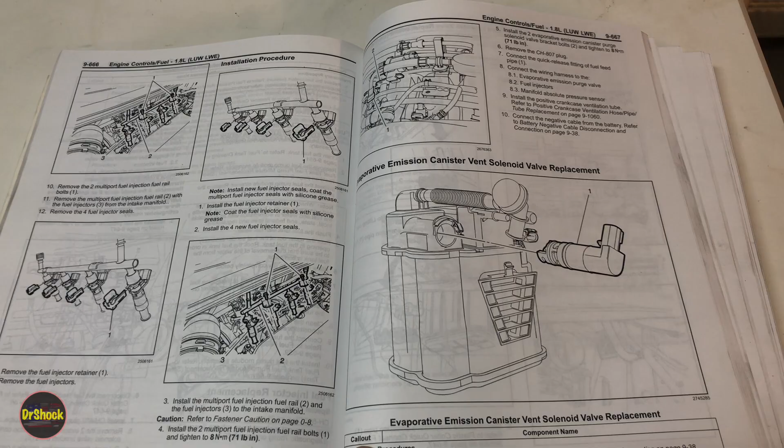All right, guys, in today's video, I'm going to be talking to you about how to find GM service information, service manuals, and that sort of thing. It's really handy to have a hard copy service manual for the vehicle you're working on. But if you don't have that, it's great to have the online version. But you usually need one of the two to get through the repair job.

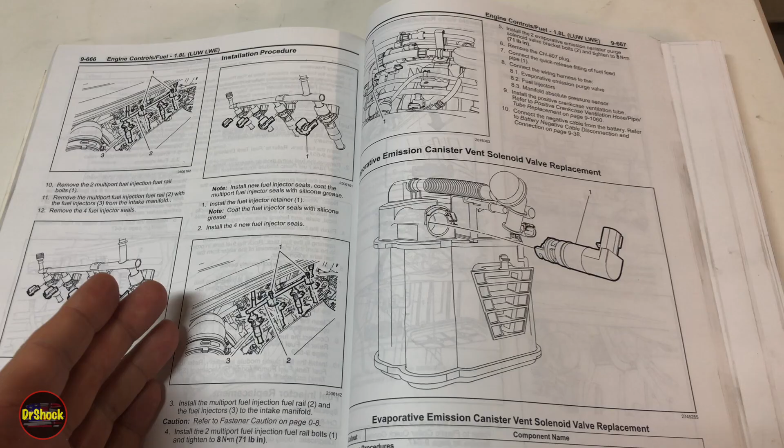Things can be very complex nowadays. There can be torque values that you need to know. There can be specific orders of operation and specific procedures that you have to follow. So where can you find books like this, online or otherwise?

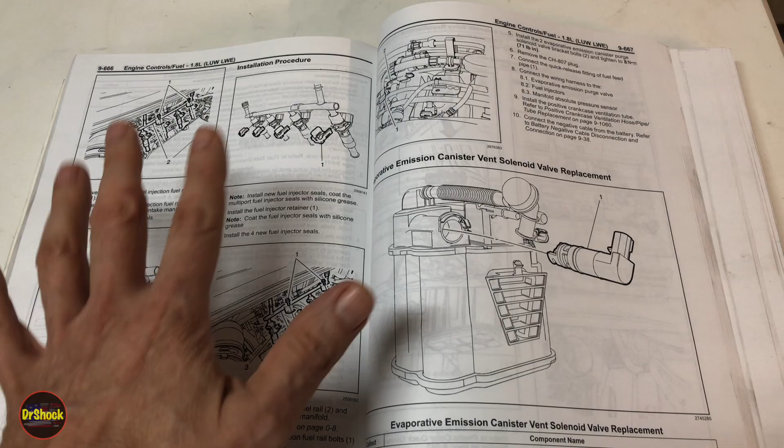But what if you're looking for a brand new one? How do you get a brand new book like this? And how do you get this information in an online format if you don't want the book? I'll show you that too. So if you're interested in that, stay tuned. That's what we're covering in today's video.

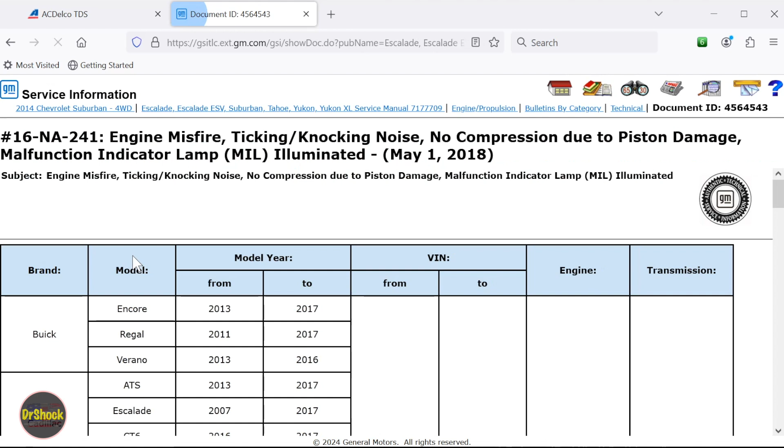If we go back further and get back to the previous main menu on the bulletins, we can come into service bulletins and let's take a look at technical, for example. We can see for this particular model year, brand, and model vehicle, there were just these bulletins put out that were technical in nature. Here's one, engine misfire information. So this applies to a bunch of different vehicles for the range of years you see, and it would give you some information about this particular problem and how you might be able to deal with it.

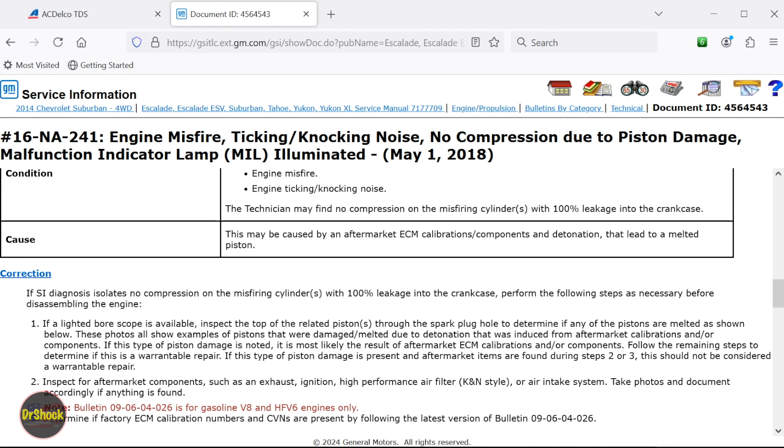These bulletins tend to cover things that are either not clear in the service manual or not addressed in the service manual. So it's always good to look at the service bulletins for your problem first, if it's something that's diagnostic trouble code-driven, or unusual. And then if it's just run-of-the-mill, hey, I want to know how to replace part XYZ, you can just go straight to the service manual. So that's pretty much it, guys. This is everything you would get in the hard copy manual online here.

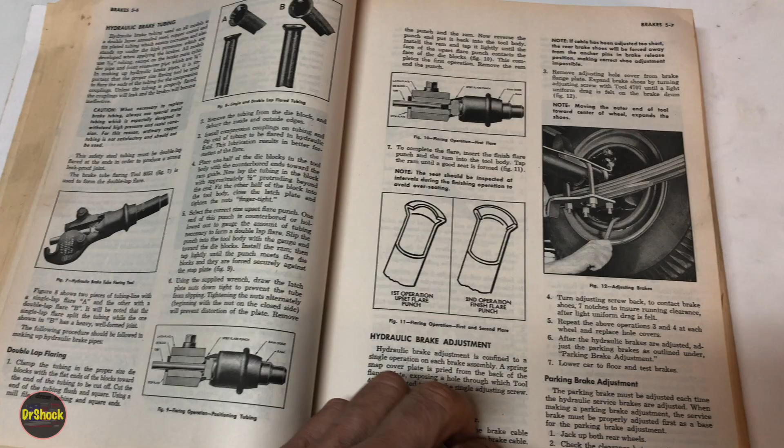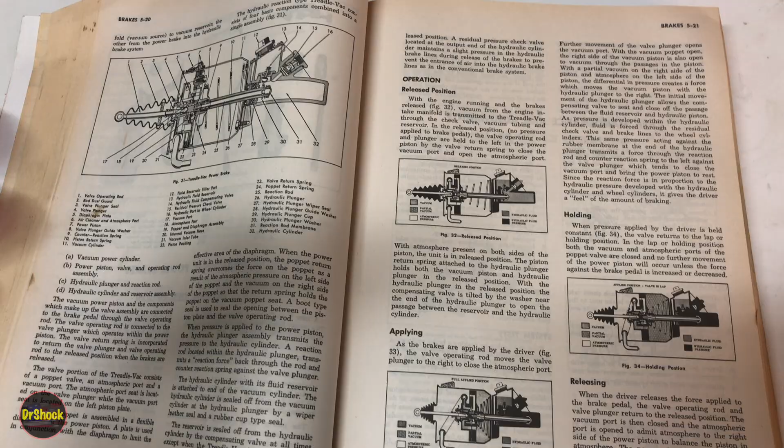All right, guys, the last thing I would show you is for classic and vintage vehicles, these old shop manuals are very often reprinted. They're reproductions, in this case 1957 for Chevrolet passenger cars. And it's exactly like the original manuals of the day. All the detail, the torque values, which were important even back then, all reproduced in a brand new manual format. Many classic cars and trucks from the 70s and earlier, you can find reproduction manuals.

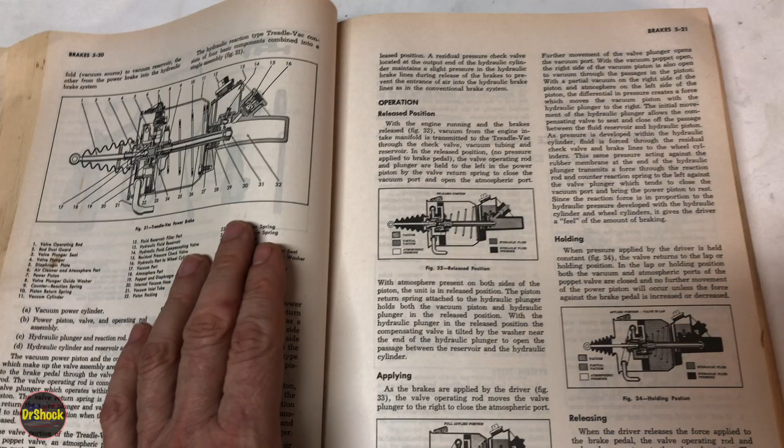And that can be an option where the vehicle is just too old to show up on AC Delco TDS. If you looked at that, you can see that practically there's nothing on there older than 1980, and really anything older than 1996 isn't going to have a shop manual. The only thing you're going to find prior to 96 is some service bulletin information. So for anything older than 96, you got to find a used manual or a reproduction manual.

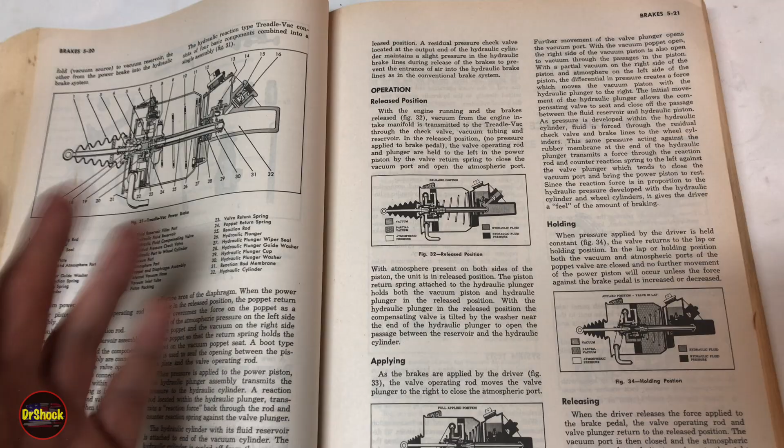Anyway, I hope this information helps you out on finding genuine GM OEM service information and the various options available depending on the vintage of your vehicle.